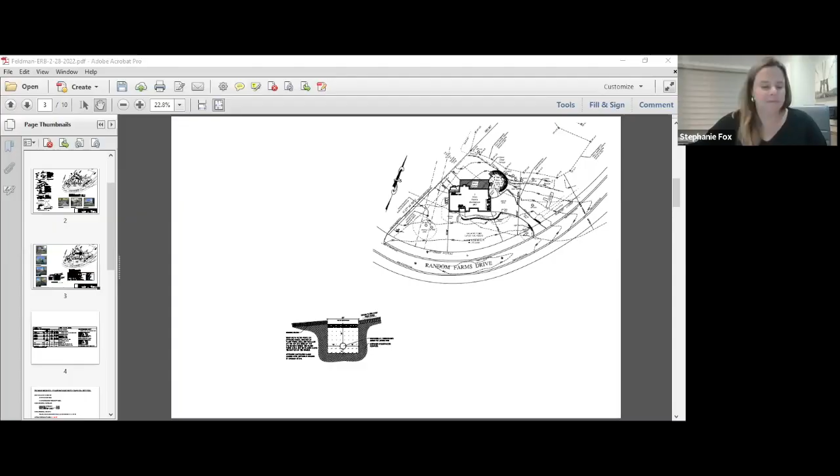Okay, so it's been a while since we've been in front of the board. We did an introductory meeting back in June of 2021, just to introduce the project and get some general feedback, which was very productive for us, because I think it's made us prepare a more substantial application. That being said, not much has changed in the scope of the project.

Just to recap, since it was so long ago, what we are proposing here is to remove this existing deck on the back of the house and replace it with a new deck, which is going to extend the length of the back of the house, as well as removing these retaining walls, these planting beds, and the existing stone walkways, and replace it with a new stone patio. The stone patio will have sitting walls and a fireplace as well, and stairs down to the backyard.

This is the location of the existing walkway to the driveway, which is in disrepair, so it needs to be replaced, but that footprint is staying relatively the same. Additionally, there's an existing wood fence along this portion of the property, which is also in disrepair. We are proposing to replace it with a permanent deer fence, but as I understand it, and Paul can speak to it better, as part of his proposal he also needs to provide temporary deer fencing in order to establish the new plantings.

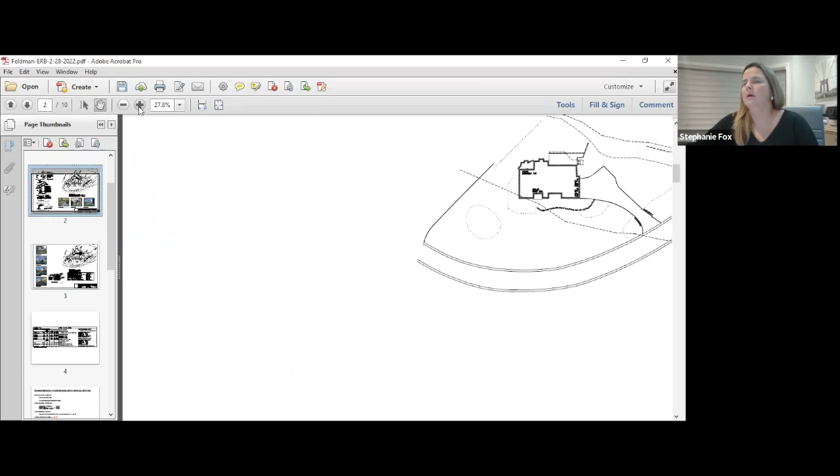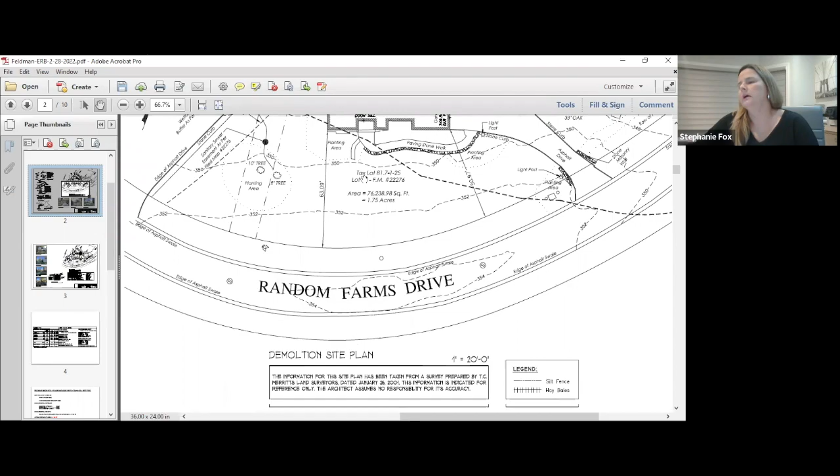Let me just give you some more visuals of the existing conditions. So again, this is the existing deck, retaining wall, walkways, planting beds and such in this area, which is essentially being repurposed. And then the deck will extend here, close to the corner of the house. In the photos, you can see these are the stairs down from the deck, leading down to that paved area, additional walkways, railroad tie retaining walls and things like that.

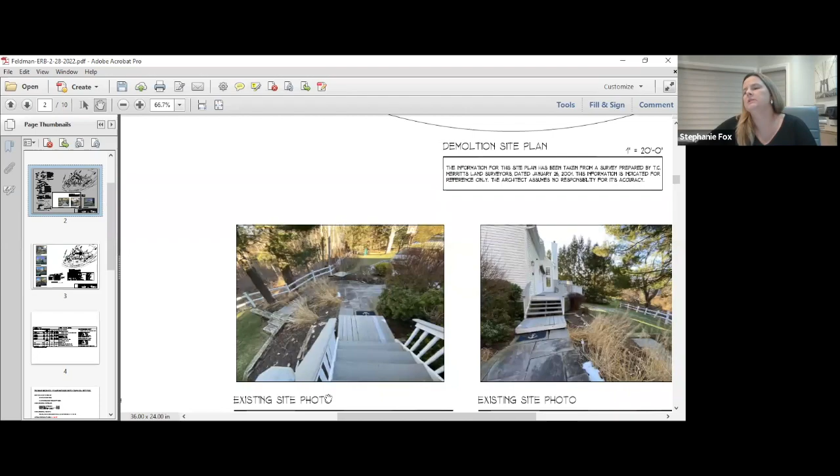Here is a pine tree that will need to be removed as part of the project. We've made an application for that as well. Just an overview of the rear of the house. As I said, this deck will be removed and it will be replaced and extended to near the corner of the house at this location.

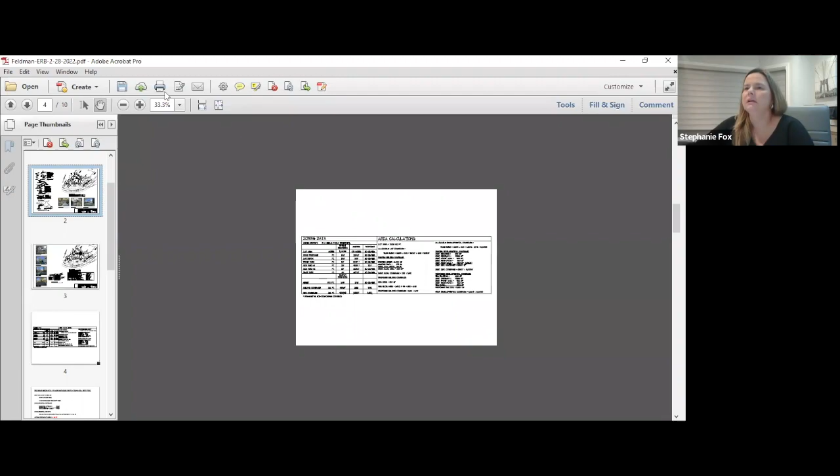As part of the, so there's a lot of calculations on this sheet, but I sort of did a summation area calculation sheet just to sort of give the key points of what the project is. So the original deck was 379 square feet. We're proposing to add a new 590 square foot deck. That increases what the town of New Castle considers building coverage by 211 square feet.

Of course, we also have the category of developmental coverage. For that, we take into account the new building coverage of 211 square feet for the deck and the new patio area of 558 square feet for a total new development area of 769 square feet.

That being said, it can be argued whether or not you want to or not. It's really, I don't think, super important, but there's those other sort of gray areas of retaining walls, walkways, stairs, planting beds, and things like that, which have been developed. It's just not as substantially developed as say, a patio or something like that. Those areas amount to about 306 square feet.

Technically, I guess, it could be as little as 463 square feet that this project is actually providing new impact on. That being said, I did some takeoffs from Paul's plans. He's providing a mitigation planting area of 5,300 square feet, which is well above any of these numbers to try and mitigate any of this disturbance on the site.

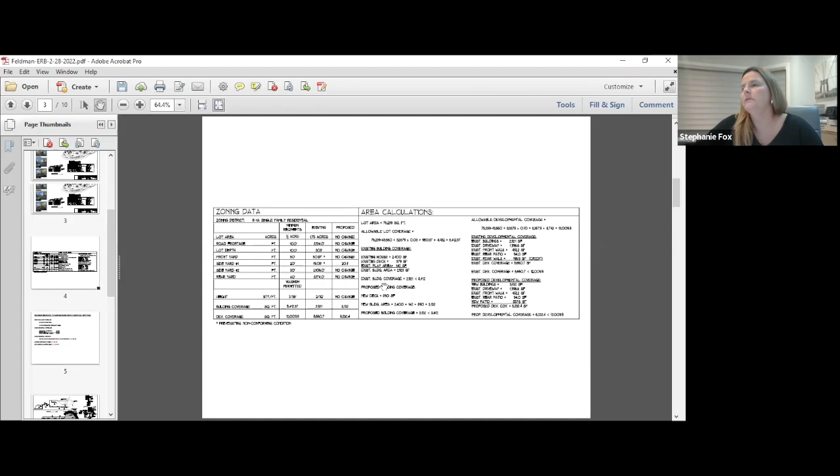Also, to piggyback on that, the project itself is not going to trigger the requirements of stormwater retention, just because the area is so minute. But that being said, we also don't want, in instances of severe 100-year storms and things like that, to have this new impervious area impact the wetlands at all.

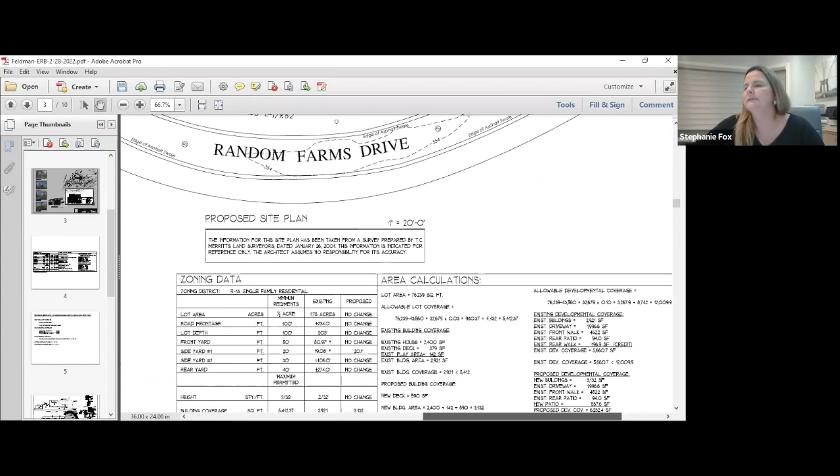So what I was proposing, which was sort of just as minimal, to also try to limit any further disturbance on the site, meaning in terms of Cultecs or dry wells and things like that. We could do an infiltration trench that would border the outer edge of the patio. We would have a grass filter strip, and then we would just put some perforated pipe in gravel and top that with mulch. And of course, there could be plantings in the grass areas or whatever.

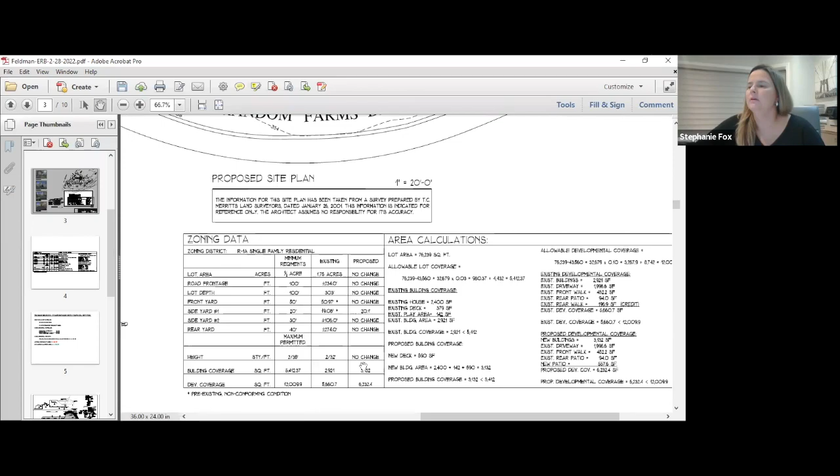But that is just sort of to take off any excessive amount of runoff that could be posed from the new patio. Certainly we would provide, and that's what this shows. This is obviously the patio, the lighter hatch. Actually, hang on. Sorry, let me go to a blow up, which would probably help more. There we go. So we have the patio with the sitting walls. Then we would have the filter strip, and then we would have the actual infiltration trench here.

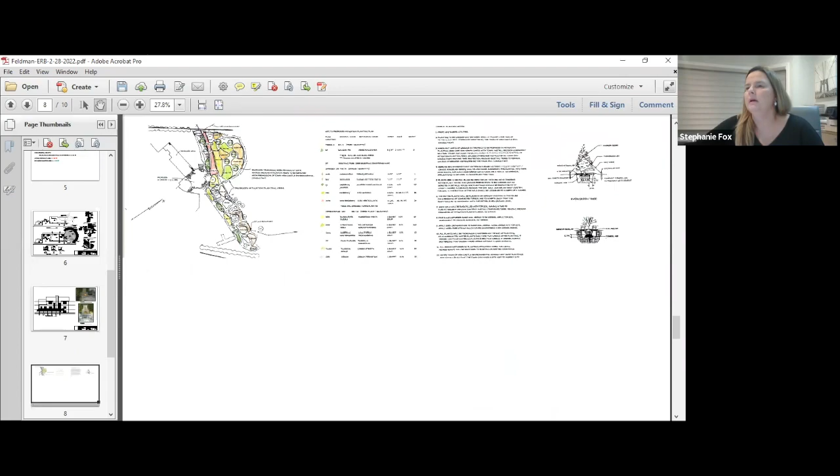And then we would pitch the patio towards the wall, provide weep holes so that it would weep out to the infiltration area. In terms of the mitigation plan, like I said, that is Paul's expertise. He did a great job. We met with Dennis last week on site. We discussed a variety of things, but I will pass off to Paul, if that's okay with him.

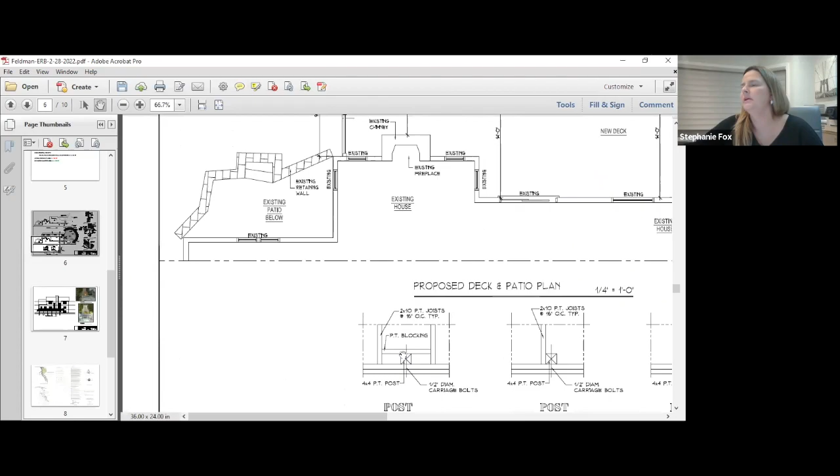Before you do that, Stephanie, if you could, that infiltration strip that goes around the new patio, what will that appear like from the surface, from the ground? Oh, okay. So let me go back to that detail. So there's going to be somewhat of a retaining wall for the patio, and then it's going to have the sitting wall, right? So that would be 30 inches from here, it would come down.

And then there's going to be a grass strip at the base of the wall, which is going to be sloped to the infiltration trench, and the infiltration trench will be topped with mulch. So it's not that you're going to actually see the gravel or anything like that. So to the right of the filter strip is the bottom of a retaining wall? Correct. But again, it depends on which way you're looking. So basically the patio retaining wall is going to come down. You're going to have a 30-inch grass strip, and then you'll have a 30-inch mulch strip. Right.

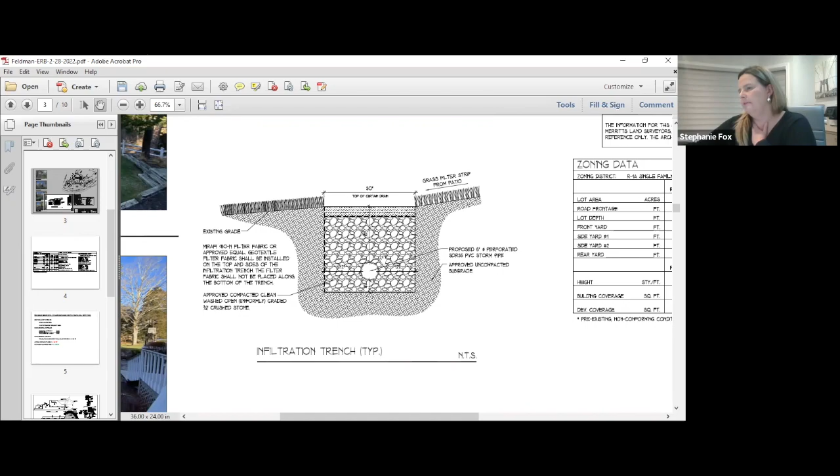And then the first one around the base is what you have listed as grass filter strip from the patio. Correct. Because if there are any large particles and things like that, it's going to get caught in the grass. And then the smaller particles will get filtered by the gravel, and then even more filtered by the perforated pipe.

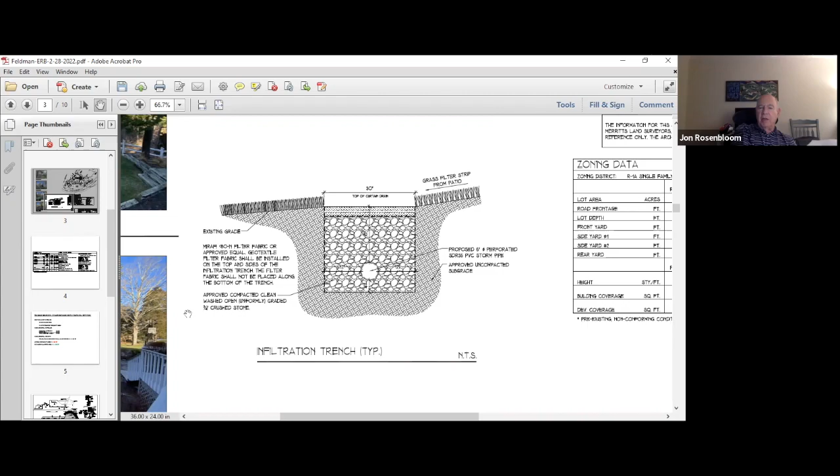So how high is that retaining wall going to be? Is it just like a curb? Well, there is going to be a sitting wall. The sitting wall will be about 18 inches high. But the intention is to really work with the existing grade there, and really not change the grade too much.

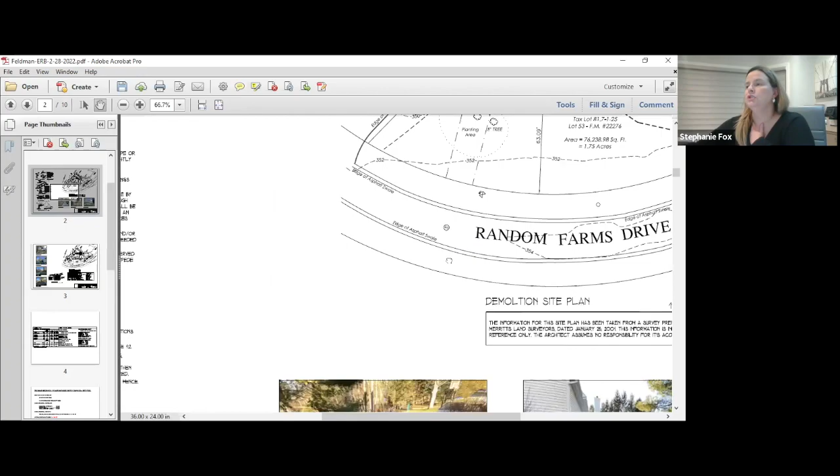You can see here in this picture, it's already developed at a certain elevation, and we're just going to keep that elevation. Now there is a drop. There's an existing stone wall here along where the fence line is. That's going to exist. It's just a tumblestone wall. Obviously there will be elevation because of the sitting walls, but we're going to pretty much work with the existing grade that's there.

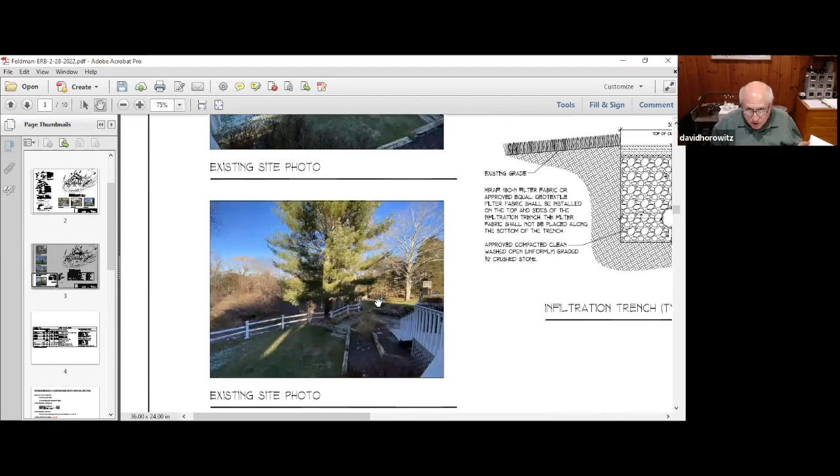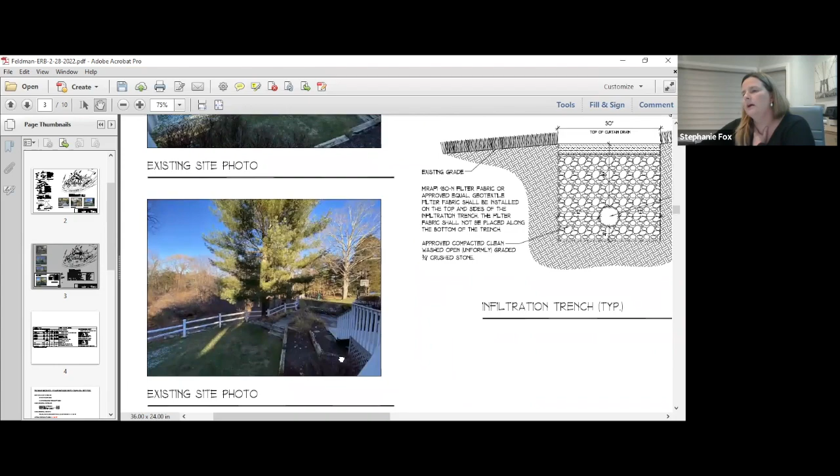And maybe there's a better picture from the other direction, so you can see it. Does that help any? Do you have a section through that wall? No, not yet, because I figured we were still in discussion with materials and size and location. But it's going to be a concrete block wall with a veneer of natural stone on both sides, and then a bluestone cap. So there's a footing, a masonry wall, and then you're cladding it with stone. Yeah, there'll be a footing.

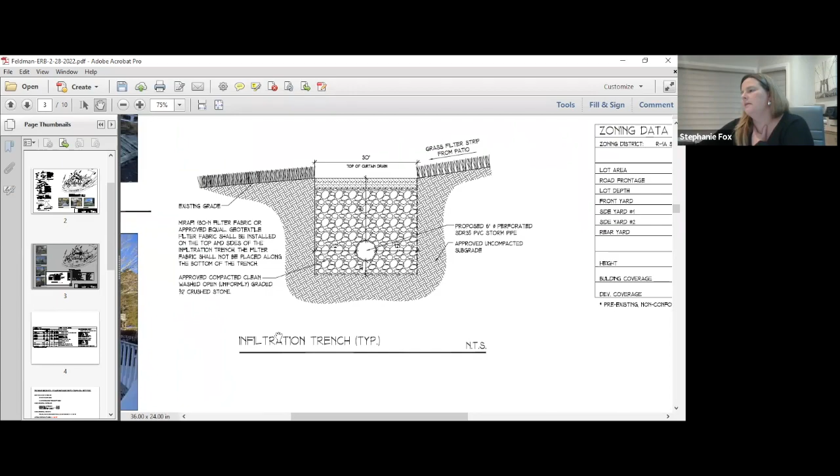And that was also the other reason for proposing this, is that we're going to be going down anyway. You're going to provide probably perforated pipe for the footing at some point. So at the same time of excavation, to limit the disturbance, you can provide the infiltration trench at the same time, because the earth is going to be exposed for the footing.

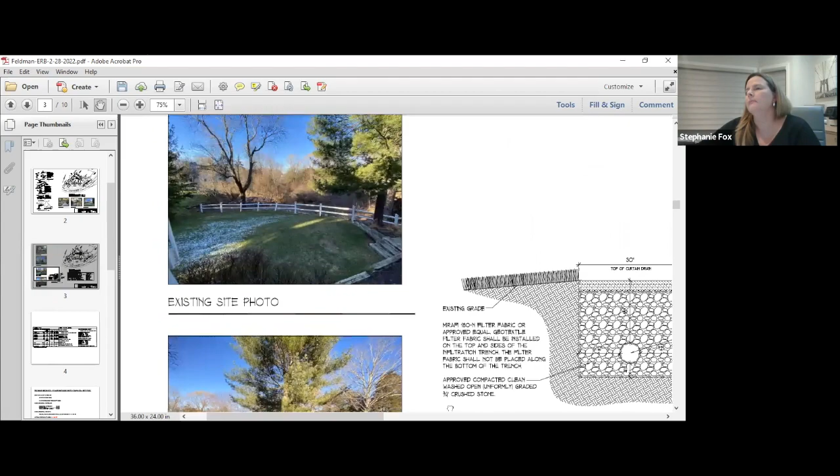Will you need some kind of formal drainage for the patio itself? Well, I think that we can slope the patio, and then we'll have weep holes within the sitting wall. The amount of impervious area that we're adding is really minimal, based on what's already existing there. So to limit further disturbance on the site, I didn't want to have to provide, for lack of a better word, built retention or anything like that. Because then you're really talking about serious excavation.

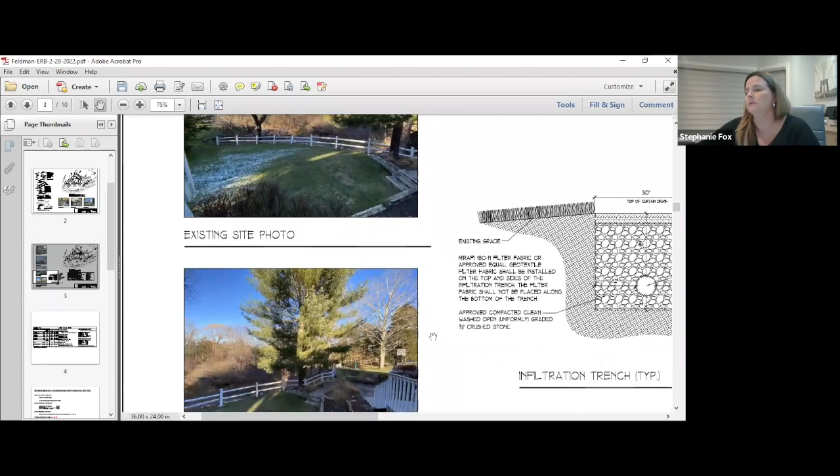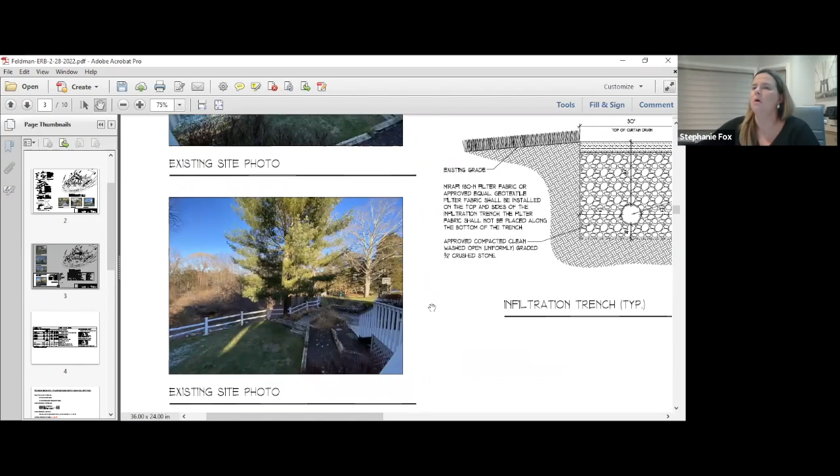So what's the surface of the patio going to be? Is it impervious? It'll be stone, but again, it'll be sloped, and it'll weep towards this wall here, and then run off into the infiltration trench. Does that make sense?

Will the perforated pipe in the infiltration trench terminate anywhere? It terminates at both ends, and there'll be a clean out there. But it's perforated pipe, so the intention is that whatever water is collected through the gravel will naturally absorb into the soil. If there's such an extreme rain event that there's just too much water, it'll bubble up on the ends and spill further into the yard. But that's more of a really extreme weather event.

So when you say weep holes, they'll go completely through the wall? Yes. Okay, so any water that pools or accumulates on the patio will be able to find its way to one of the weep holes and go all the way through to the outside. Correct, to the other side of the wall. That's what I mean, to the outside of the wall. Because the other thing is, I guess we could add a yard drain type situation.

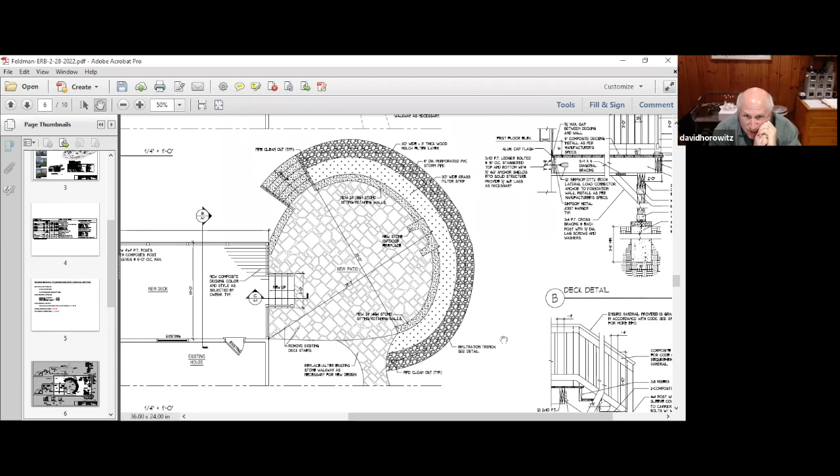I don't. Just from a maintenance standpoint, from a little experience, putting some plastic pipe through the wall, the ability of that pipe to get clogged or have something stuck in it, versus a floor drain where you could keep the water from just being in a muddy condition, pooling around the perimeter. Just something to think about.

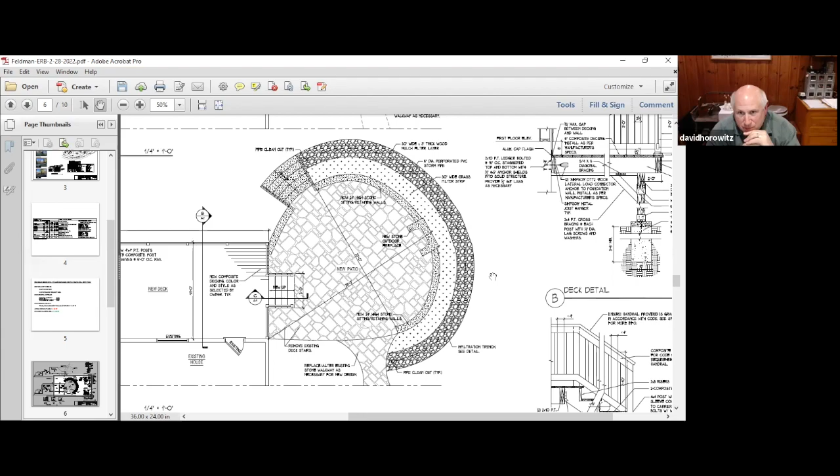You can always clean out the drain, lift it out and clean it out for sand and muck. But when those weeps get clogged, they can be a little more difficult to route out. A rock gets stuck in there, or some leaves get stuck in there, and they block up pretty quickly. Yeah, I'm not averse to the yard drain.

I just thought that the filtration strip would be a nicer feature. But again, it's really the same amount of work. No, as an idea, it's a good idea. So if the board has a strong opinion one way or the other, I'm not opposed to having a yard drain. Just a conversation, just an observation. Okay.

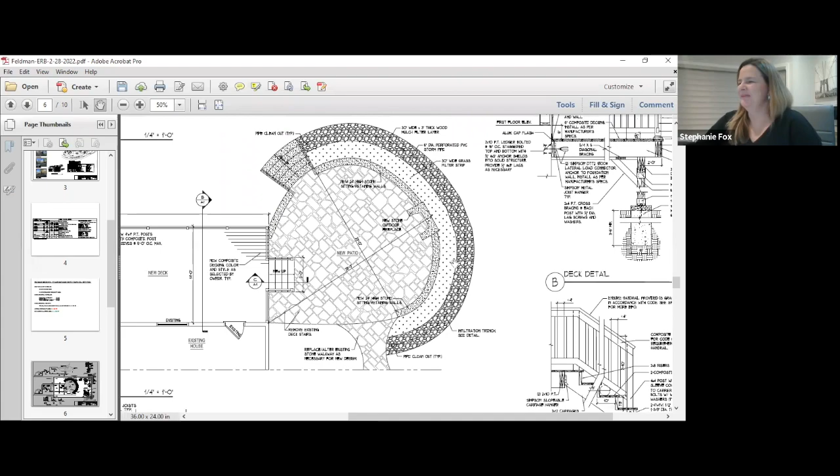So this is Paul's mitigation. Is this where you want to start, Paul? But I'm sorry, just one other thing. If you do need to get footings in, the area of impact and your temp protection area should be considered, because then you're going to start going 2 or 3 feet.

Right, well, yeah, that's true. But the overall impact, even if you didn't take into account any of the potential discounts, we're talking about under 800 square feet. And if we were to add even 20% to that, the mitigation area is over 5,000 square feet. Understood. This is just for during the work phase, to show where you're going to put the spoils.

And are you going to use a machine or hand dig this? I think it's probably going to have to be a combination of both, because the new wall is going to be sitting relatively close to the existing rubble retaining wall that you really can't see on the site unless you're down in the wetlands. So for that area, they're probably going to have to hand dig some of that. But some of it could probably be machined, probably a very small machine too, because there's not a lot of room there either.

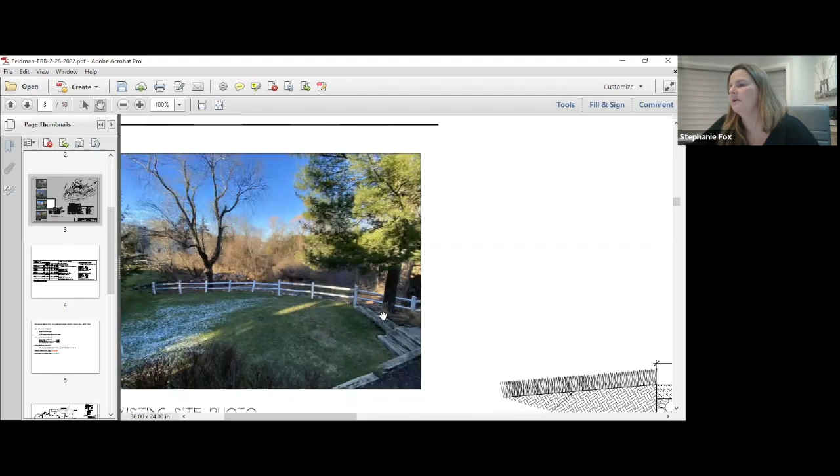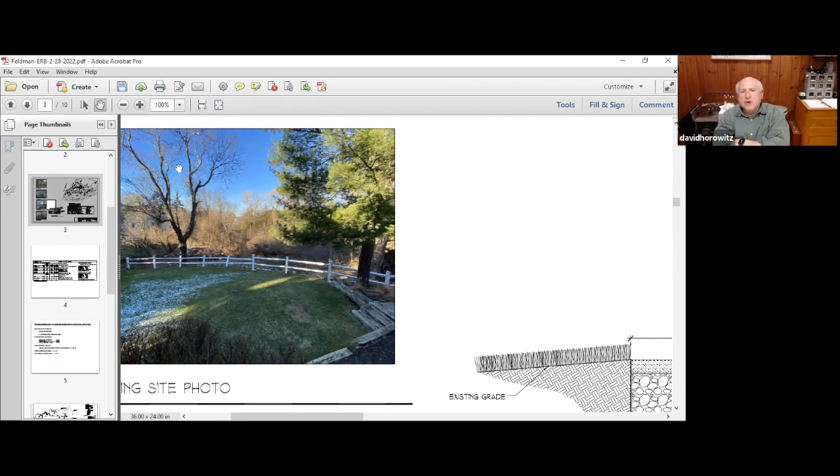And then the deer fencing just goes into the ground. There's not going to be any footings for those. But I think the wall, maybe in the area of the patio, they might have to shore it up or something like that if the ground moves a little bit, but otherwise it looks fine. Yeah. Right, so there's no work to the rock wall being requested as part of this application?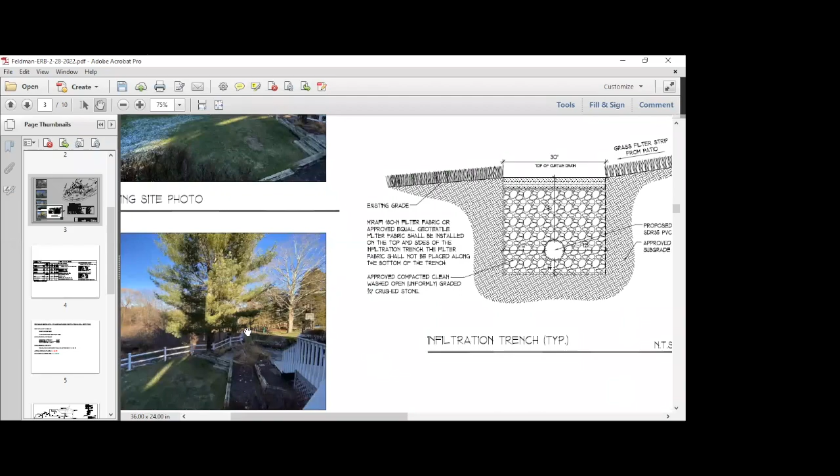No. Okay, and just to interject, if I remember it correctly, Paul and Stephanie, there's almost like a slight batter, I'd say, to that wall. So I didn't really look at it as a perfectly vertical structure. It kind of works a little bit with the slope to sort of transition to that lower elevation, really where the wetland just begins.

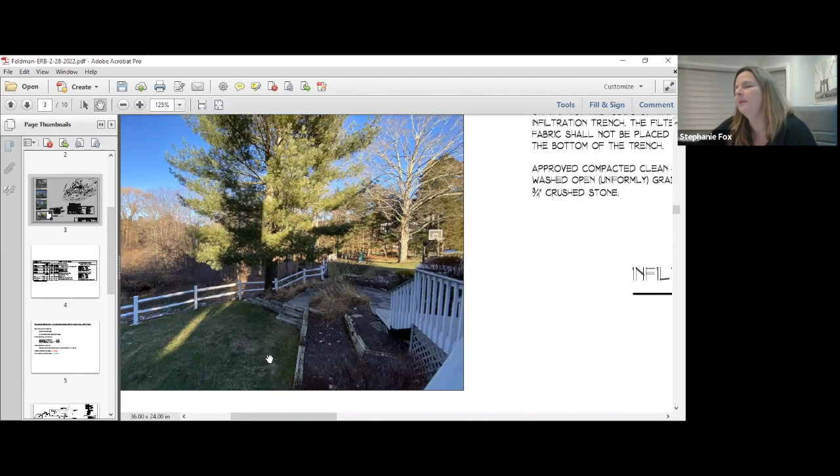So, to the point of the applicant, if it doesn't have to be messed with, I wouldn't look to mess with it. Yeah, you're right, Dennis. We keep calling it a wall, and it is a wall, but it's not the kind of wall that I'm proposing, let's put it that way. It's not the footing and it's natural. It's just providing a natural boundary between the wetlands and the more developed area. Okay. Thank you. Clearly man-made, but as natural as possible.

What, was it rubble that they put in there originally to level the site enough to build a house? Yeah, I bet you. That sounds right.

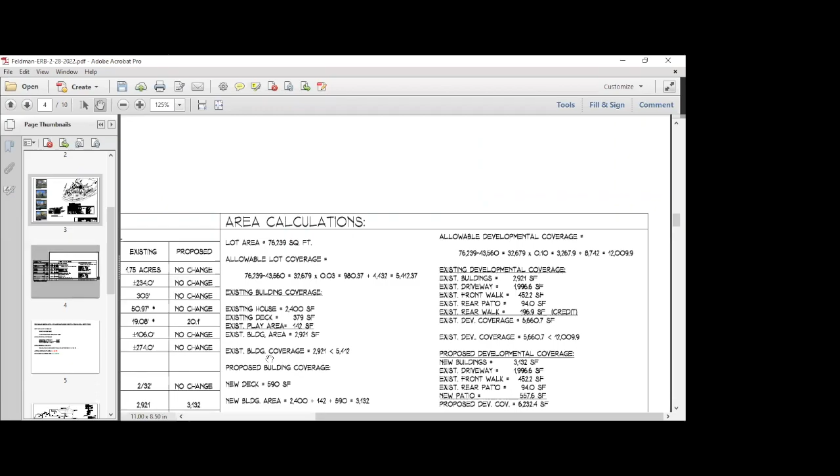I got one of those in my house too. I got about 4 of those at my house.

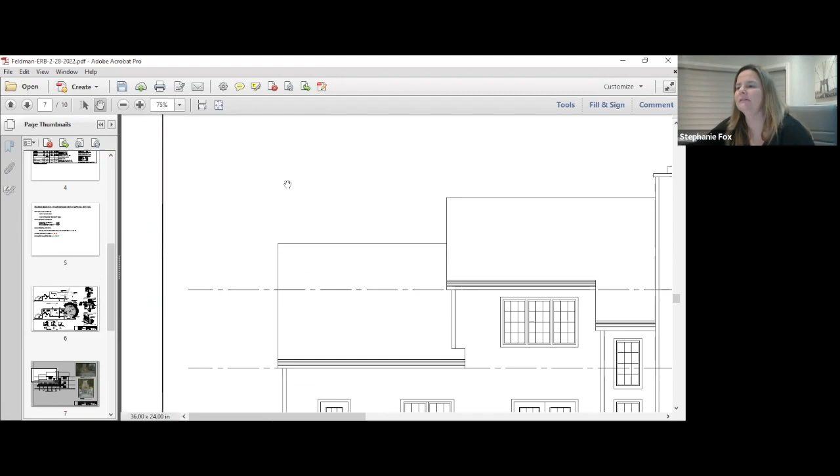Hang on, I'm scrolling, sorry. Oh, I think I'm zoomed in too much. There we go. Can you go down just a little lower? Sure. To this plan? Yeah, we'll look at that one first, and then once I get done with that, if you just go up, that'll be fine.

For the record, Paul Jaehnig, I was the fellow that mapped the wetlands on the site and prepared, along with the discussions with Stephanie and the client, the mitigation plan. I first put a map together called the existing conditions map, which gives you an overview of what it looks like out at the site right now. And if you look at this line right here that's highlighted in chartreuse, that is the wetland boundary.

And as you can see, as we get near the boulder wall, which is shown right here, it gets pretty darn close to the base of the boulder wall. So we have about a 2.5 to 3 foot drop. And then from here over to this woodland edge, it's very gently sloped, less than 10% slope. Some people would just call it pretty flat.

And this land all in here, which is swampland, and this woodland border here is very gently sloped also. So everything's sloped, draining to the north. And by the way, towards the property line over here is to the west, and that's the easterly direction. So north south is like this. So we have a woodland border, and in the woodland border we've depicted some of the tree types. For the most part, red maples, various diameters, not hugely specimen trees, a couple of locusts here, and a large red maple right here, and then another one over here.

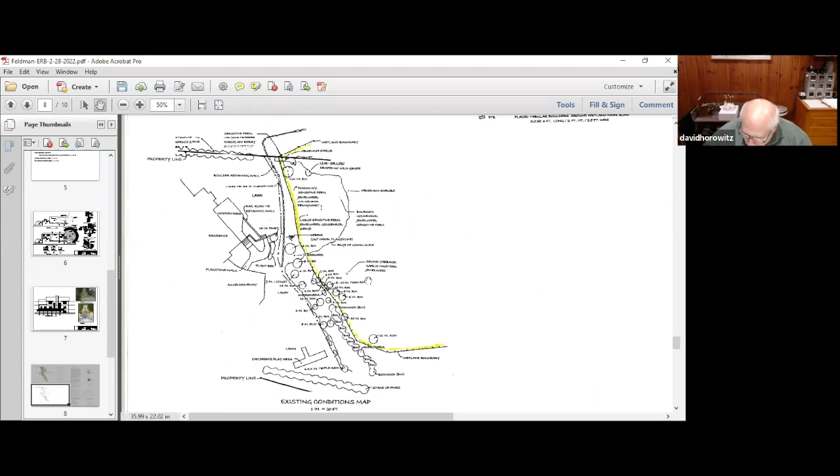I will say though, up here on the western end of the wetland, it's pretty dense shrub understory. So this wet portion of the wetland, the western portion that's open, was previously disturbed, probably in the course of developing this property. So it's not surprising you get kind of a hodgepodge of things like jewelweed, poison ivy, Japanese stilt grass, some goldenrods, and the ground is still somewhat uneven, probably due to any machine work that was done, possibly related to this boulder wall being installed.

And also along the woodland edge is a dilapidated, disrepair wooden fence, which we are going to get rid of. So the plan here is to basically remove the wooden fence and install plantings of a variety of trees, shrubs, herbaceous plants, no changes in grading. And the boxwoods that you see down here that are linear, we're gonna take them out and just replant them so they look in a more natural setting.

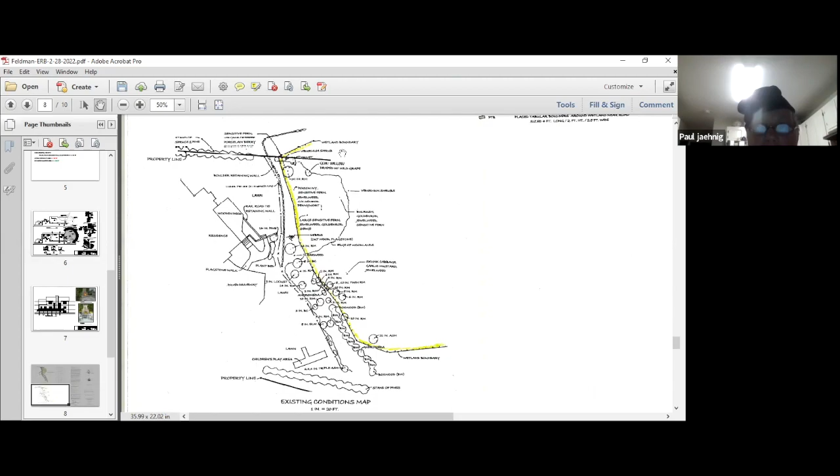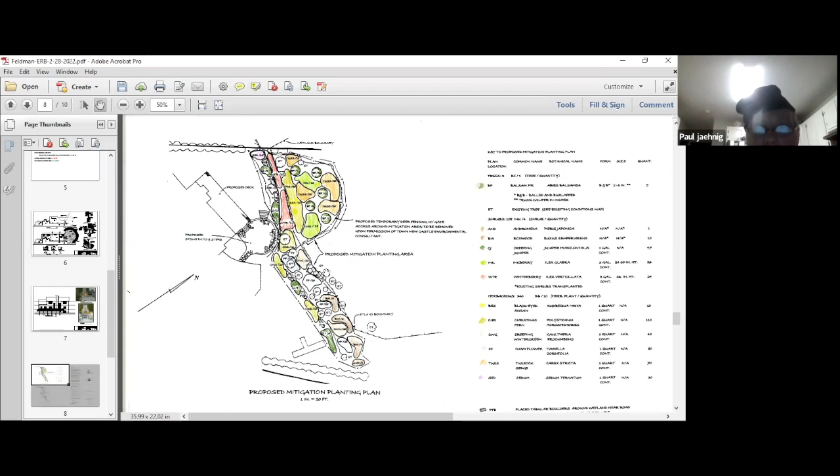So if we could go to the... up here, we have our proposed mitigation plan. It's colored. Each little area that you look at has a code on it. For instance, this one says INK, and then there's a slash with 12. That indicates in that area that it's going to be shrubs of inkberry, and in that planting bed will be 12 inkberry shrubs.

And if you go to the key over here, this highlights the trees. Got about 5 trees, 108 shrubs, and 340 herbaceous plants. And the type, the size, and quantities of each are shown here. And we would pepper them in this area to make a more diversified structure with trees being planted here, shrubs, and then interspersed with herbaceous plants.

Many of the types we've chosen are more of the evergreen variety. This was a preference of the property owner. We had no objection to it, but they're native and they're going to be quite deer resistant. Along the border of the wetland, between the wetland edge and the boulder wall, which we're not going to take down, we're going to plant this with a number of winterberry shrubs.

And then on the upslope side of the boulder retaining wall, we're going to put a little buffer in here in the non-wetland area. This is now lawn. We're going to plant shrubs and herbaceous, and then we're going to intersperse it with some rather large boulders, which we've shown down here in our key. They're about 3 to 4 feet by 3 feet by 2 feet. And they're actually going to be placed all along this border where the fence is. So the idea is it's just going to soften the edge. And this is more or less to soften where the lawn is, retaining wall, and it's a safety feature.

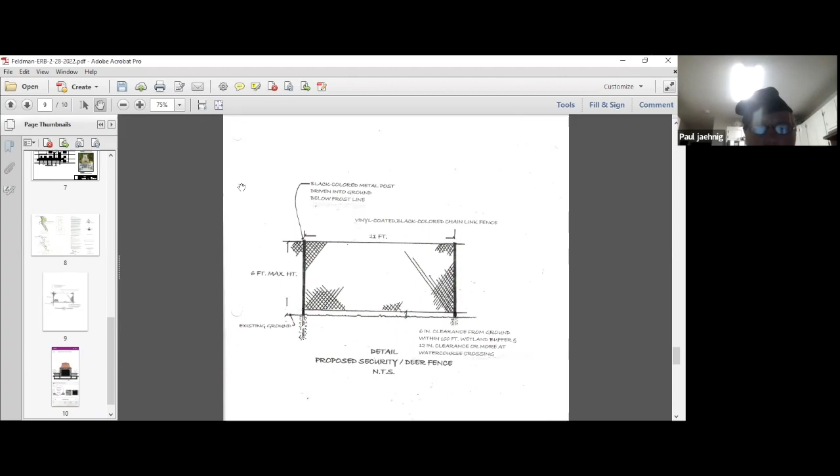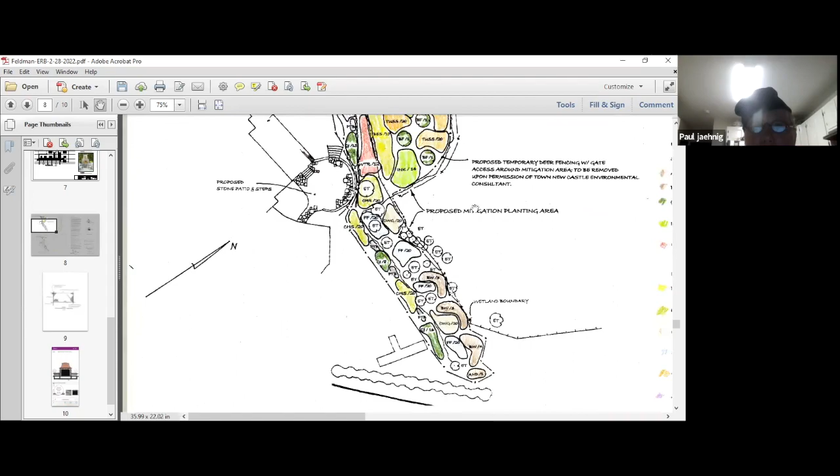It's going to be installed by pounding into the ground, black vinyl fence, and they'll have openings at the bottom for any little critters. Yes, there's a detail that we're highlighting to show the clearance underneath for small animals, really. And then there'd be that shrub border to the resident side of this fence. So the fence would basically be, going back up here, tucked between the wall and this planting border, and then right along the edge of the planting border down here.

And the purpose of the fence is twofold. It's probably more to keep the kids out, not the wildlife from coming in. It's really a safety issue. The Feldmans have some young children. I noticed they had some soccer nets. So it's really just so mommy and daddy don't have to retrieve items thrown by the kids towards the wetlands till they get proficient enough to not do that. And if that ever happens, you never know.

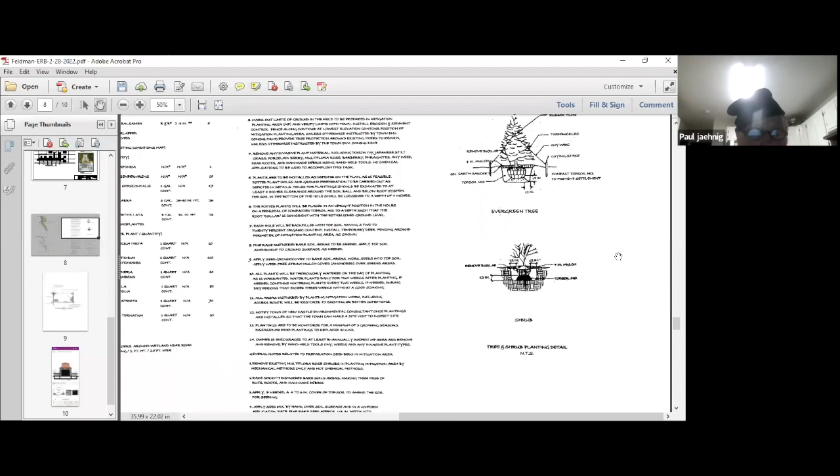And the details related to the planting of everything are right here, general planting notes. And then, of course, the details for the anchoring of trees and the planting of the shrubs. We have some general notes related to preparation of any bare soil areas that might be disturbed. We're not planning on doing any regrading, but if in the course of installing any of the plantings we wreck up any of the lawn, we'll get everything back in order.

Excuse me. I think I lost you there. The other thing, I lost everybody. Hold on. Oh, there it goes. Sorry, it blanked out at my end.

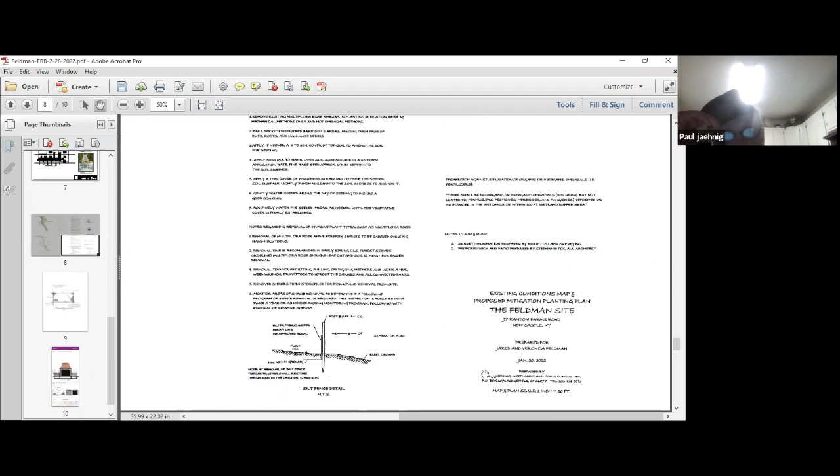And then we have a general note over in the lower right-hand corner, prohibition against the application of pesticides, herbicides, et cetera, within the wetland buffer. And detail provided for the temporary silt fencing. The silt fencing will just be on the wetland side of the planting area, really as a deterrent so the workers won't inadvertently migrate into the area. And all the installation of these items, including the trees, will be done by hand or handheld equipment. Won't be any machines going in there.

Won't be taking any trees down in the area. I think the only thing that's coming down is that pine tree that's over in the patio area. That's correct. At least that's what I'm proposing. Yeah, so in this area that I've got as the mitigation area, there won't be any trees or shrubs to be removed.

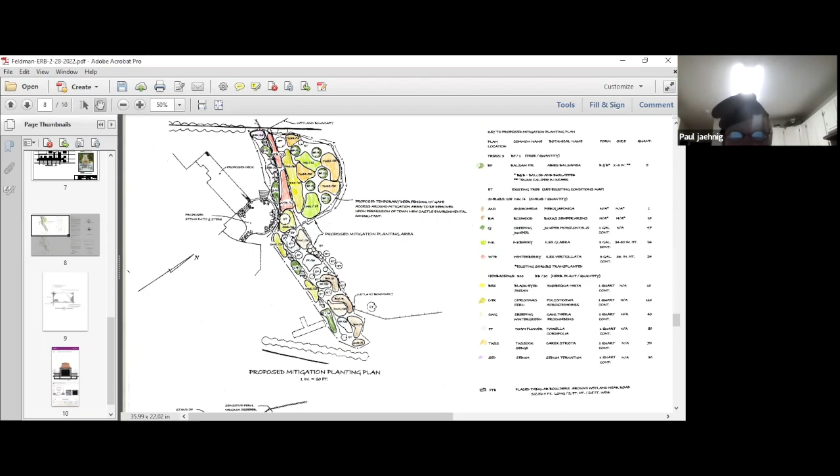And the boxwoods that I talked about, that's 1, 2, 3 areas. So we're just going to replant them so they're a little more staggered looking. The owner liked the boxwoods, so we'll keep them in there, but we're just realigning them. And that's pretty much all I can tell you. If there are any questions, happy to answer them.

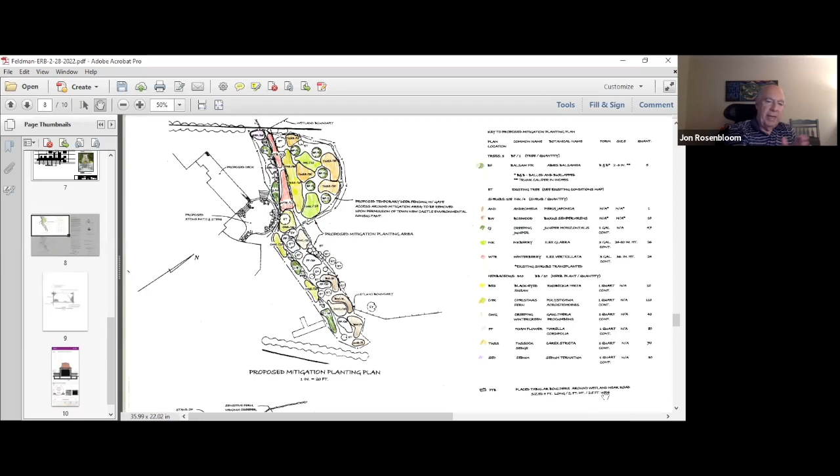Paul, you talked about an area, I guess, inside of the fence, where the boulders are being placed. That right there, that's now lawn. Oh yes, this area right here. Correct. Did you do a calculation of the exact area of how much lawn is being reclaimed? I don't have a number. I could certainly, easily give you one. Matter of fact, I could probably calculate it right now if you'd like. Just give me 2 seconds here.

I just think if it's a more than de minimis number, it's useful in calculating effectively how much mitigation there is as opposed to new disturbance. It's about 250 to 300 square feet of lawn area.

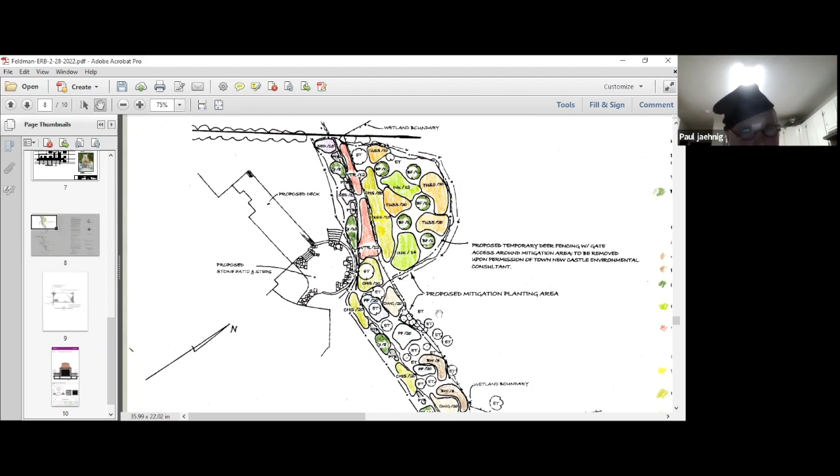I guess my other question was, to what extent did you consult with Dennis in coming up with the specifics of the planting plan? And what's Dennis's take on it? Well, we met out at the site, and he was privy to the plan. We discussed what we wanted to do. There didn't appear to be any objection.

Yeah, obviously Paul has submitted plans before on other applications. So Stephanie said, we'll contact you, Paul's going to develop a plan and, when available, would you be willing to meet out on the site? I said that would be a good idea.

And Paul did describe, the wetland is kind of unique, that sort of open area, because it does transition to a fairly dense shrubland, which obviously is nothing negative. And the woods, like all the woods, are fairly open thanks to all of our hungry deer.

So this was one of these cases where it seemed to satisfy both the perspective of planting for the purposes of improving some of the areas of the wetland so close to the developed portion of the property, while simultaneously the preference of the applicant for some of the evergreens, and in the case of the ilex, those are beneficial quality species and plantings. So that was not an issue.

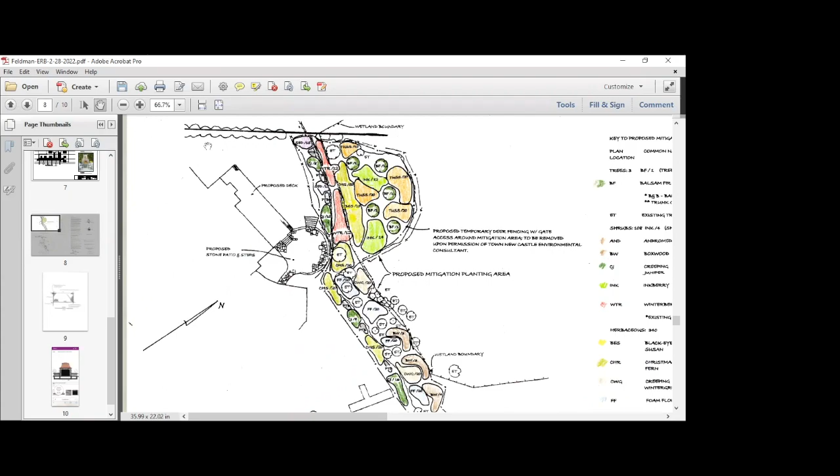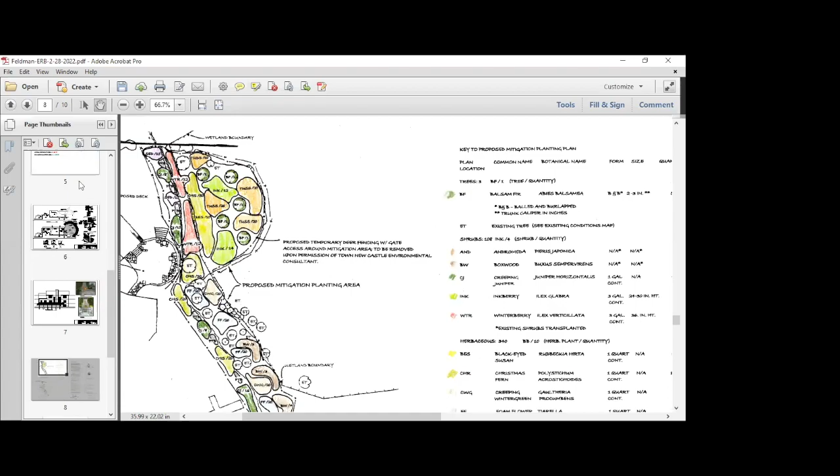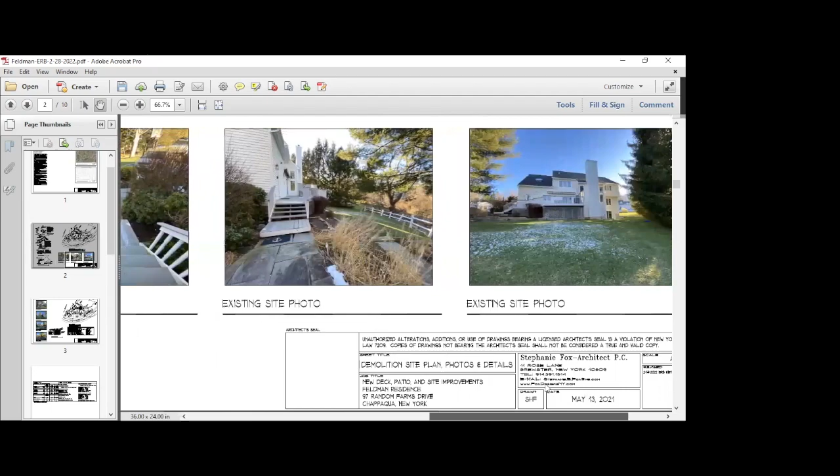And also, if you go up to the top of the drawing, and you saw them in some of the photos, there is a row of existing Norway spruces. I think they serve as a border to the adjacent property. I think that's what they were, right? So I didn't have any issue, even if someone had an aesthetic concern. There are evergreen trees, which are more landscape species, but in transitioning into the wetland, it's not going to be bad for the function of the wetland, and it's not going to be a bad look either.

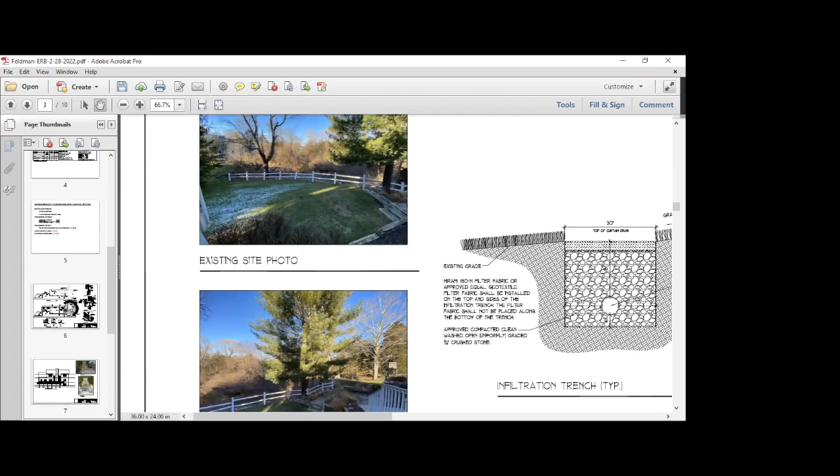The only thing that I had concern with, that I didn't echo the first time, probably since there wasn't a plan, I just wasn't really thinking about it. We've had some applications since, one of them actually before the planning board, and you could leave this up because where it says existing site photo, when you look into the background, and even when you look at an aerial, right next to this property is a fair amount of woodland, and it

is a conservation subdivision. The only reservation I have, and we haven't even spoken, or I don't know if Stephanie has, but the building inspector may have some comment as well, especially in consideration of the row of Norway spruces. To have an outdoor wood burning fireplace, I would probably honestly object to, because my main concern would be it's preventable. And by it's, I mean any migrating ember past that white fence, if something were to happen. How were you behind this as the environmental coordinator? I don't think I would be behind it.

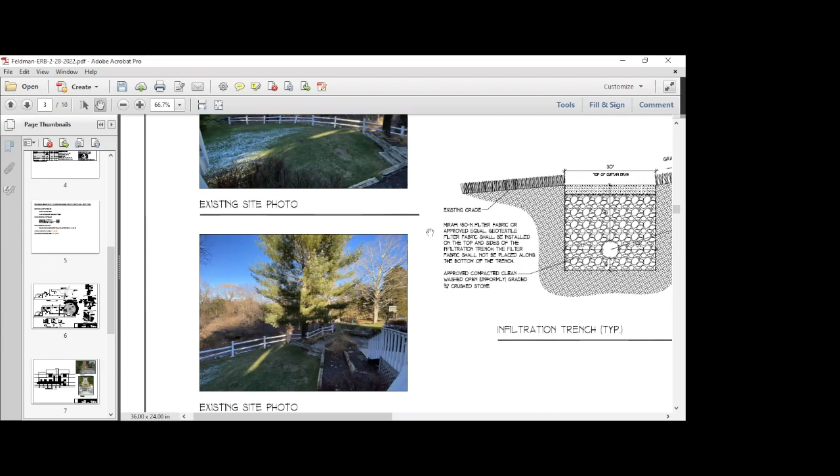And I know that we've had, it was in the Meadow Hill subdivision, a house that received approval, and they were proposing to put just an outdoor fire pit next to a pool. As it got close to the property line, one of the comments in my review memo was, I'm curious what the fuel's going to be for the outdoor, at which point the chairman almost didn't let me finish and cut me off and said, yeah, I was curious about the same thing,

I know that there's mixed feelings about, when they start burning, people have complained about smells, people like the smells. And I know that board was expressing their preference that, when it comes to those types of applications, they would prefer gas. If this is going to be used for cooking, I'm not going to look to regulate that. But in terms of fuel source, the wood is a problem for me. Other than that, I was pretty much wrapped around everything else that was proposed, project-wise and planting-wise and

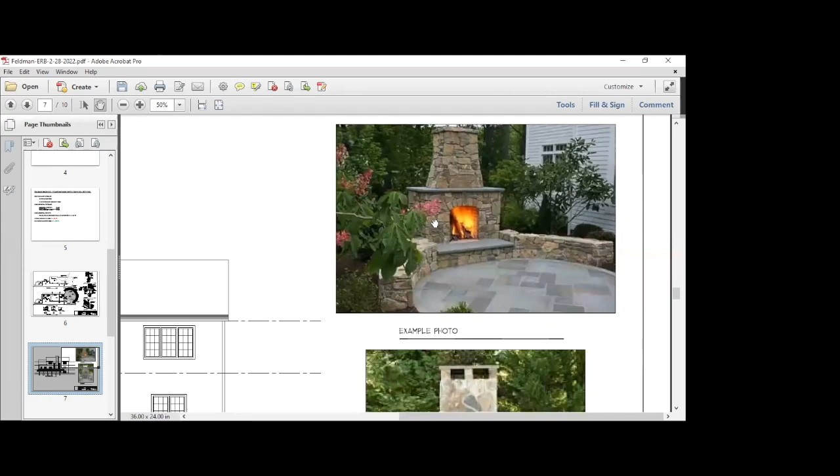concept of mitigation. If I could, just before we go back to your concern on the fireplace, Dennis, in terms of the plantings themselves, you're convinced that the mix that Paul's proposed has a decent chance of flourishing there, and with the right maintenance, they should be able to do the trick? Yeah, especially with the fencing. I didn't see any mulching in the notes.

You don't need that. I don't disagree with the watering, but some of those plants, and Paul will admit from knowing the area, I'm sure they'll do okay even without watering. Especially where you look to put the tussock sedge, it's got to be pretty wet there, and it is. It transitions to fairly wet there.

So the herbivory control is important, especially for the early plantings, because they are deer resistant species, but ultimately, they don't always get the memo. They still have to go out and sample and be like, oh yeah, right, I really don't like this. But by the time they determine that, they did a number on your installation. So I think it'll work.

If I could just interject, I did give you a little history of this wetland, but most of the area that we're proposing to do mitigation, both wetland and non-wetland areas, are previously disturbed. This area on the west end of the wetland has no tree canopy; when this was developed, a prior owner clearly did some disturbances there, not only removal of vegetation, but they must have gone in with something, because the soil borings I took indicated that they're wetlands, but the profile's been mixed up or disturbed.

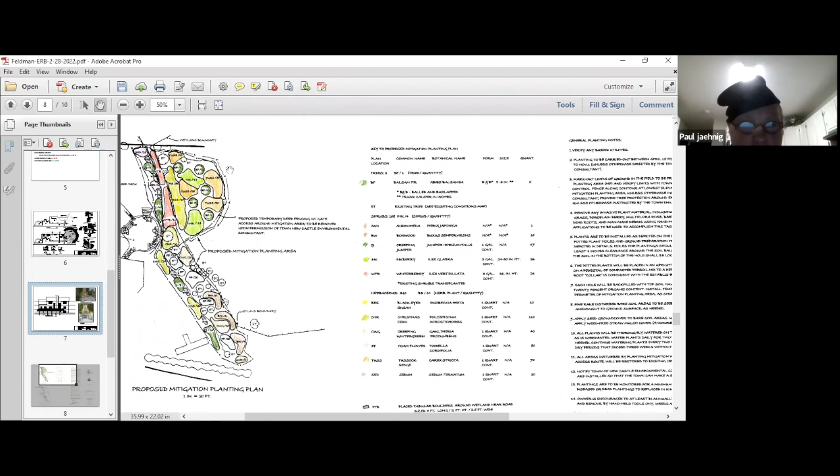I'm not sure if you gentlemen still have it, but as part of our original application, Paul, in addition to flagging the existing wetlands, prepared a wetlands report, which we submitted last year. If you're interested, we could certainly provide that for you again. He did a great job of summing it up, but he gets very specific as to the quality of the wetlands and so forth in his report as well.

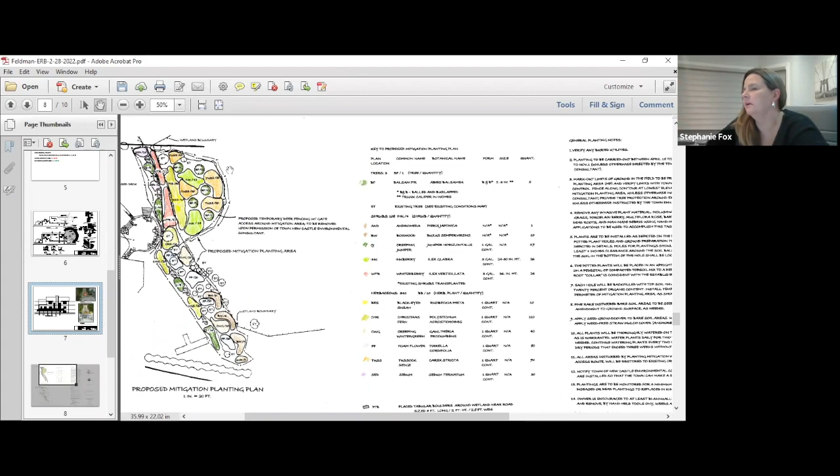Well, also, I'm okay personally if Dennis is okay on this. Yeah, and also, to Paul's point, not speaking to the soils, I'm not disagreeing with them on that. The only extra point I was going to make was, there was a look to me that you're standing there on the lawn area and you're looking at this open area, and then in the distance it kind of transitions quickly to dense shrubs.

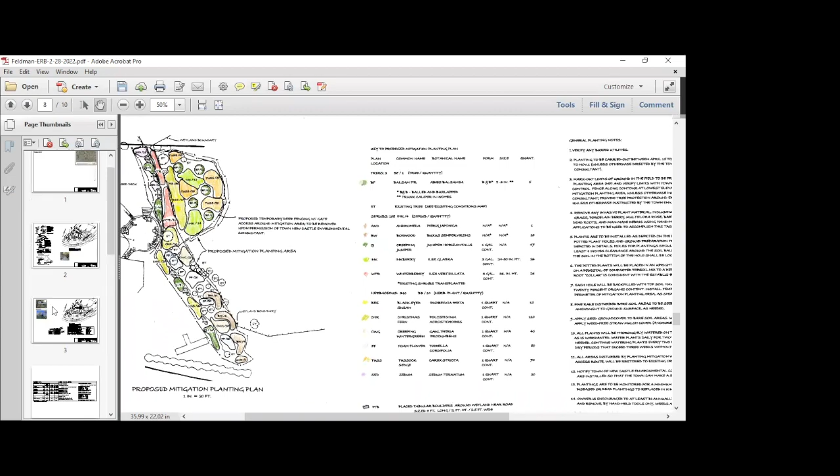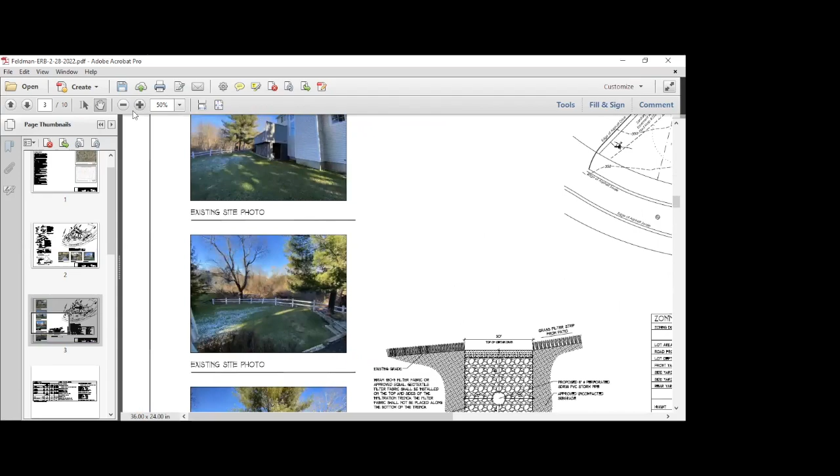And I said, there's opportunity here for more of an ease of transition to go from lawn to some other type of environs, and then off into the more thicket, right? That organisms, anybody that wanted to utilize that, would obviously be well shielded. So I think, to Paul's plan, it does that, frankly. So that's why I had no objection, because when I first saw it, that's kind of where my thinking was. So I'm good.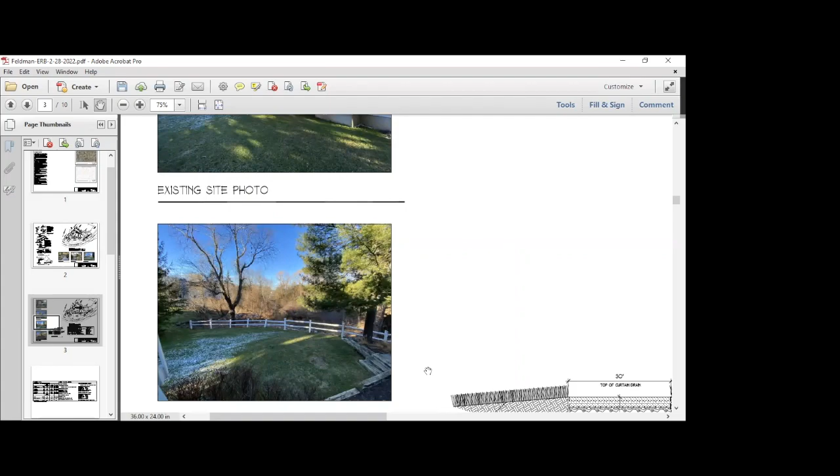Also, in terms of the likelihood of success of the plants, they've included a 3-year monitoring and replacement period in the notes. So if anything is not successful, it looks like they'll be replacing. That's correct. All right, so not to give Dennis short shrift or cut him off, do you want to talk a little bit about the proposal for the fireplace?

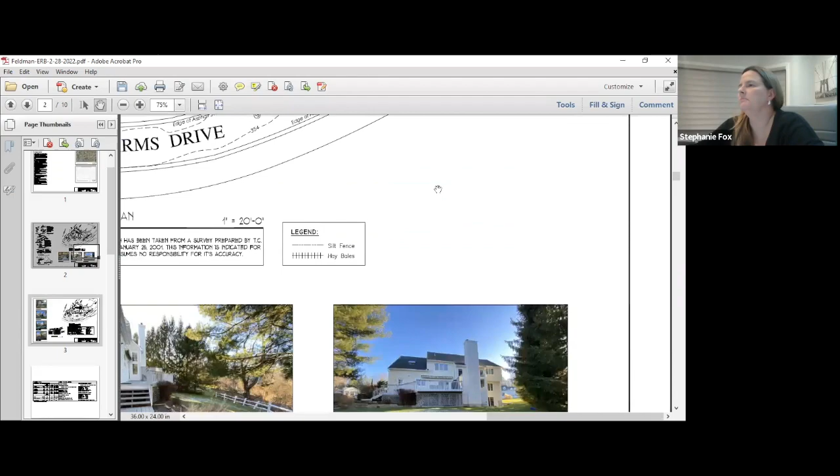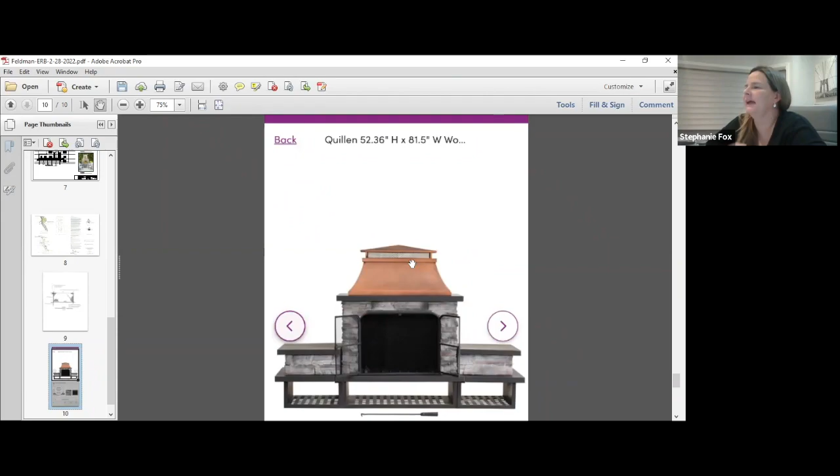Sure. So obviously my clients would prefer wood burning. I didn't know if Dennis would consider anything in terms of, say, a cover with a cap, or even a screen. But if it's such a strong opinion, then we can certainly go to propane. But I think the idea of having an outdoor fireplace is to have it wood burning and not have to have a gas insert. Otherwise, they could easily have done that inside their home.

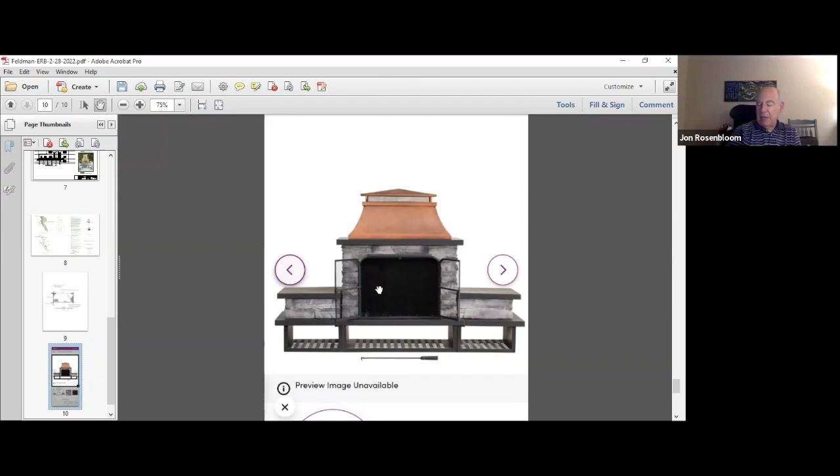But so the purpose of this is aesthetic, it's not to cook? No, my client does want to be able to cook paella in a giant paella pan. That's actually the motivating factor for the fireplace. Dennis, actually, to tell you the truth, this is the first time I've ever heard anything about sensitivity and issues having been raised with respect to either the design or the fuel requirements for outdoor fireplaces like this.

There's been a transition, because we do get a fair number of complaints in our department, but that's not really my motivating factor, who smells smoke, who doesn't. I didn't save it as a file, so it's difficult to show. But if you look at the position of the house from an aerial photo perspective, and the remainder of the property they own that's not developed, it's all woody, trees, shrubs, overgrowth, understory, and it would be fairly close to where this fireplace would be. So I just have reservation. It's just a feeling.

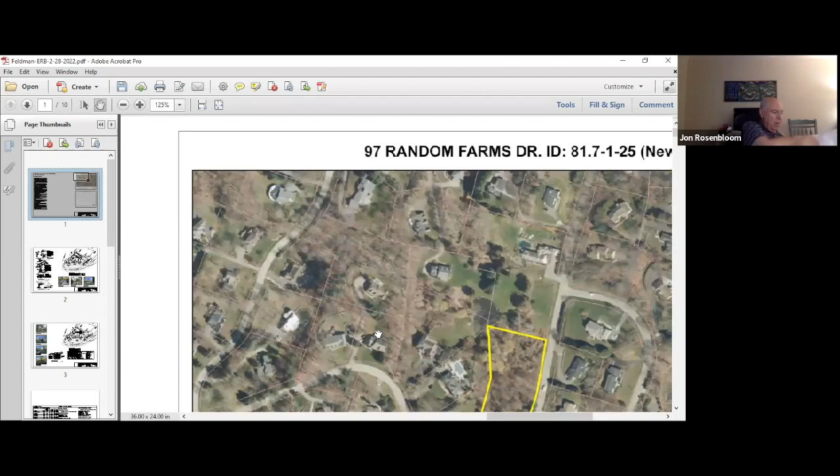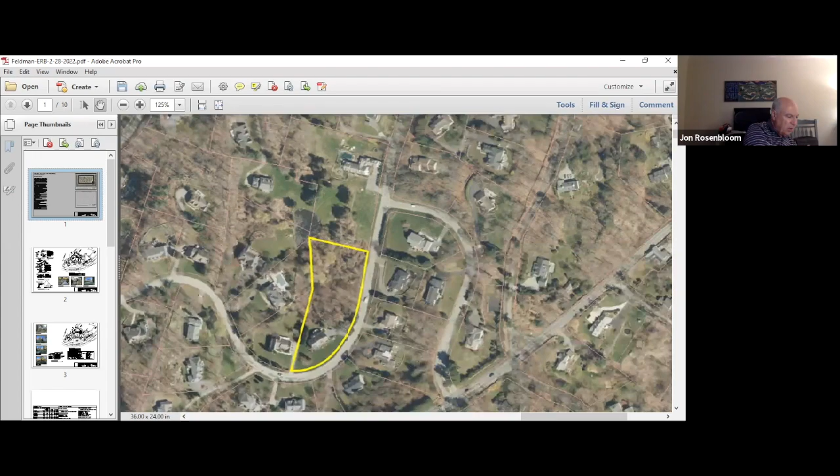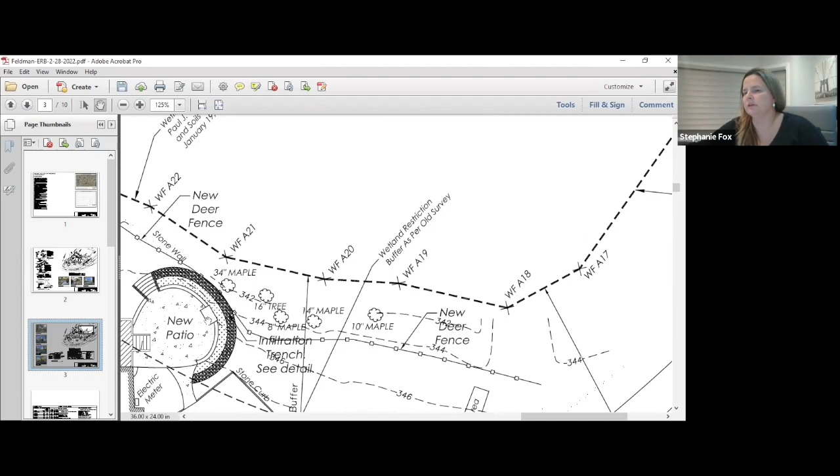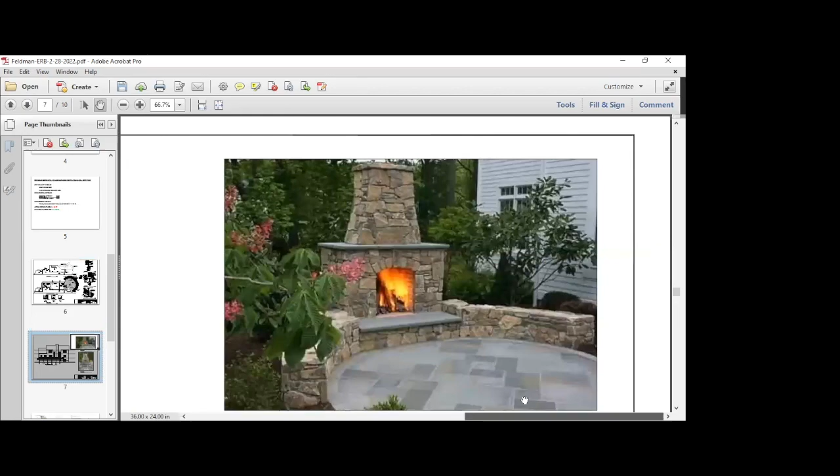Is the location of the fireplace shown on the drawing? It is. Is that the rectangle in the new patio? Yes, this is on the site plan. This illustrates the patio. There's on the floor plan. Sorry. It's located here. And just to clarify, this hasn't been discussed with anybody else, like the building inspector, right? With respect to the fireplace, just here? No, it is not. Okay.

Has the building department expressed sensitivity to these issues? Well, I should qualify that. When I first started the project, there was a potential zoning issue with the deck. So I did submit the whole project to the building department for review, to trigger the denial so that we could go to zoning. And the inspector had a great suggestion, because we were really only off by a foot, which was to pull the deck back so that we could avoid a variance.

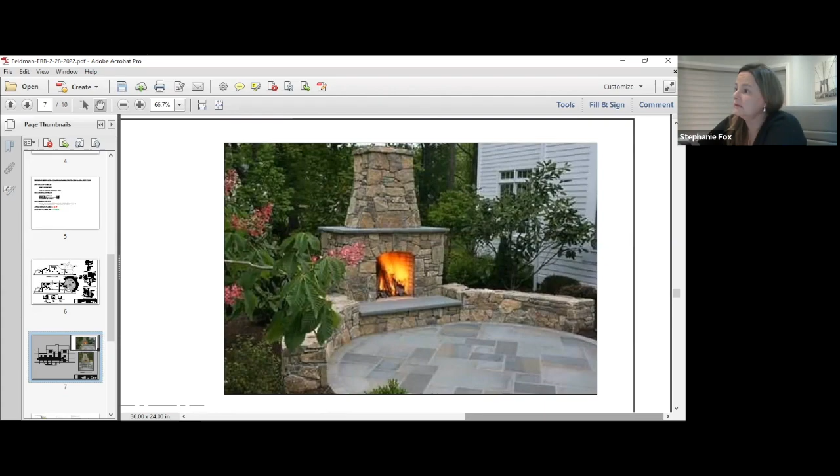But I can say that in that conversation, his concern was the deck. His concern was not the patio. But again, it wasn't a formal full review, so. Right, and if he was looking at the deck, he may not have been focusing on the patio aspect of it at all. That I don't know. Right.

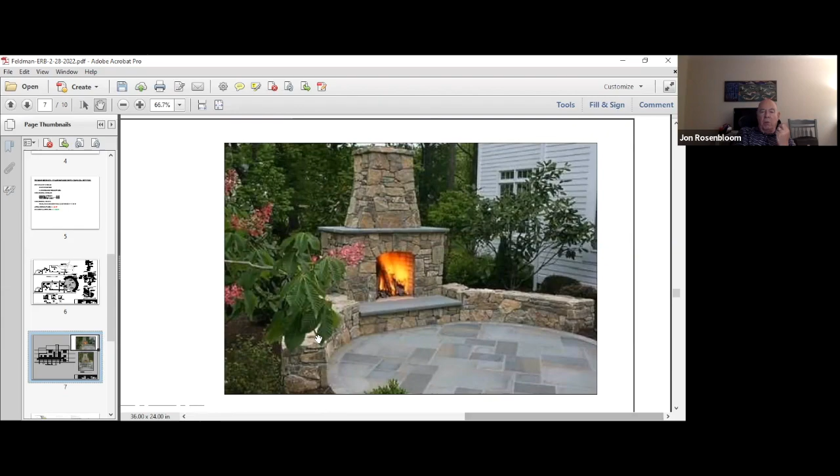So Dennis, what I hear from you is a couple of different kinds of sensitivity. One is objectionable odors, where mostly complaints would come from neighbors. Second, that I heard from you, would be stray sparks or embers that might be dangerous because of the close proximity to the wooded areas.

Would that concern be alleviated by putting, I don't know, I saw one of the drawings that Stephanie was showing showed a grate. Yeah, we could put a cap on it, or we could put screen doors like we would have inside your home. Mhm.

Yeah, I think that, right, I don't want an open pit, which I know you didn't show, and I can't have it shooting out the chimney, it's all the concerns. And honestly, if this house happened to be next to a large body of water, I wouldn't have even brought this up. So, from my perspective, it's easy for me to say this because I'm not the one who deals with the odor complaints, but,

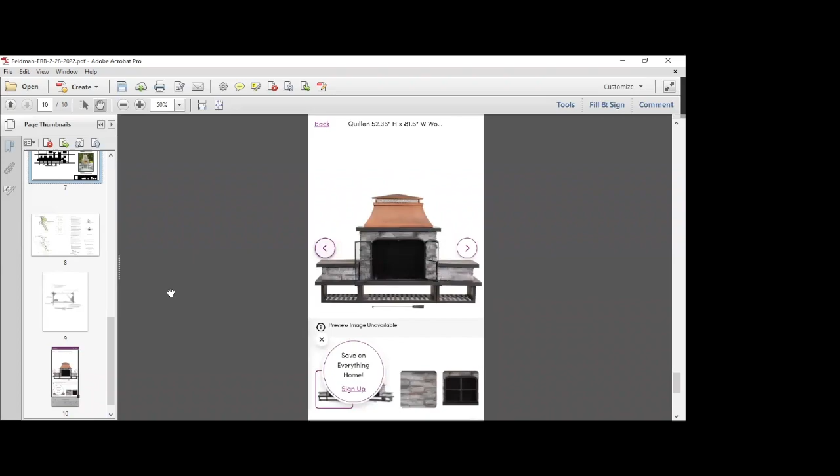Okay. Board members, any questions, concerns? Not for me. Okay. I think this has been a pretty thorough presentation. I think the process worked well with us having taken a look at it last year, and I think what you came back with looks like it makes a lot of sense. So hearing no objections, I'll entertain a motion to approve the project and issue the permit.

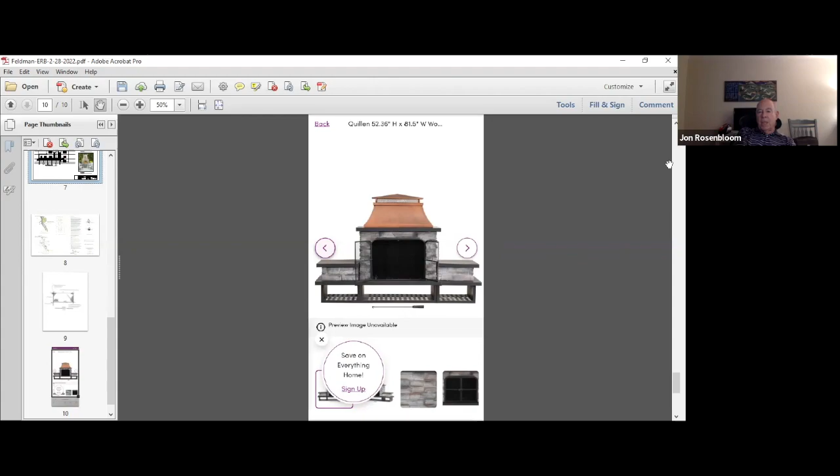Ivan making the motion. Yep. Second? Second. All in favor? Aye. Motion carries. Dennis will put the permit together, and you guys will be on your way. Looks like a very, very nice project.